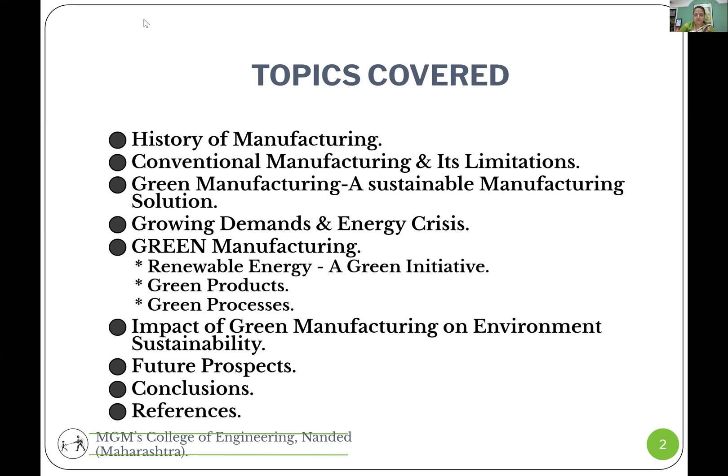So we will be covering in this webinar: we'll start from the history of manufacturing, see a little bit about conventional manufacturing and its limitations, and then go for green manufacturing and a sustainable manufacturing solution, taking into consideration the challenges with respect to energy, products, and processes. We'll see the impact of green manufacturing on environmental sustainability and future prospects.

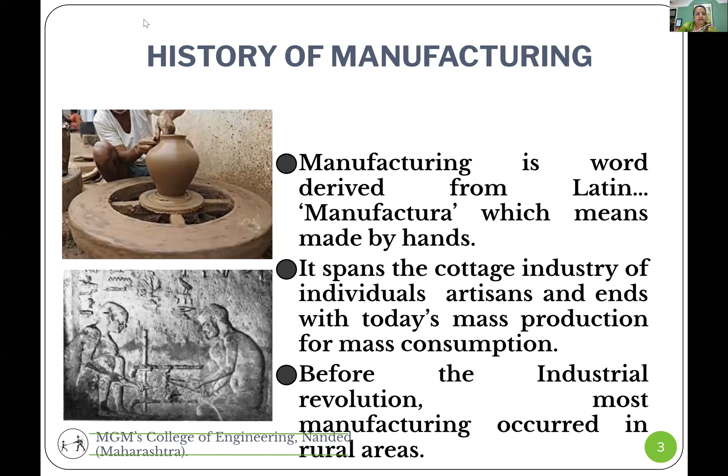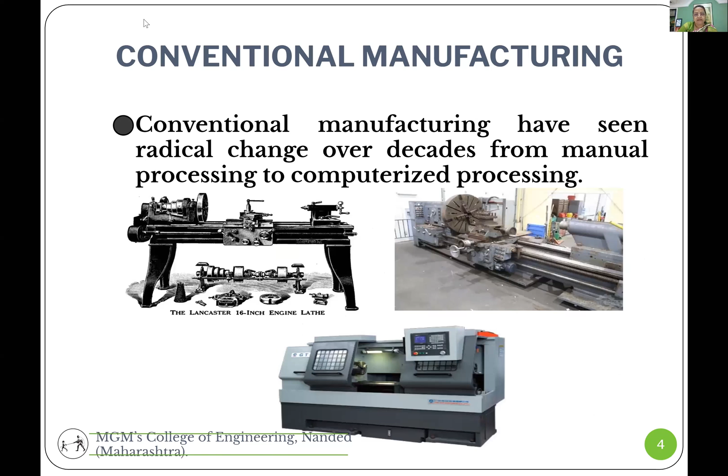So what is happening is the manufacturing system creates material wealth for human beings, but it also creates a lot of waste and consumes a lot of energy. So we have to keep thinking about how we reduce this energy consumption and how we make this production process environment friendly.

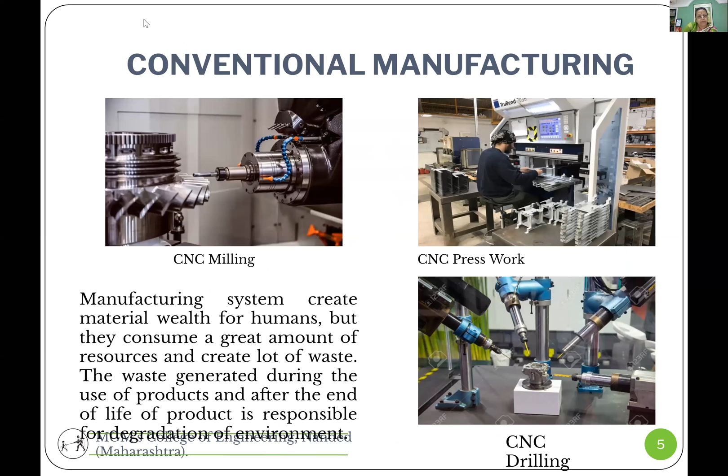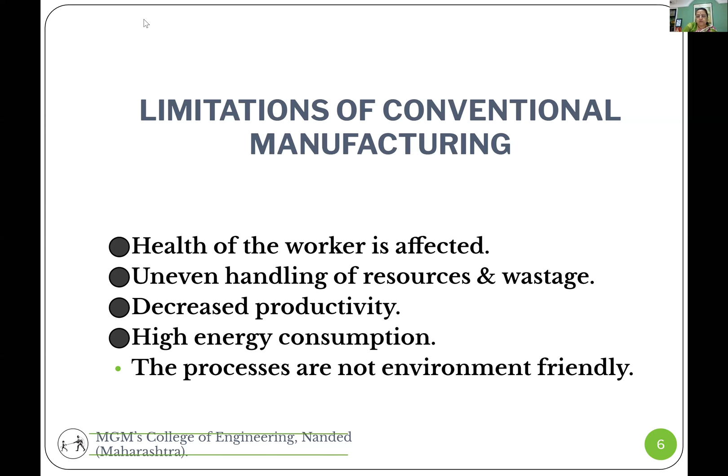Limitations of conventional manufacturing are: because of the coolants and lubricants used, health of the worker is affected due to emission of hazardous vapors in the environment. There is uneven handling of resources, a lot of wastage, productivity is decreased, and energy consumption is very high. So ultimately the processes are not environment friendly.

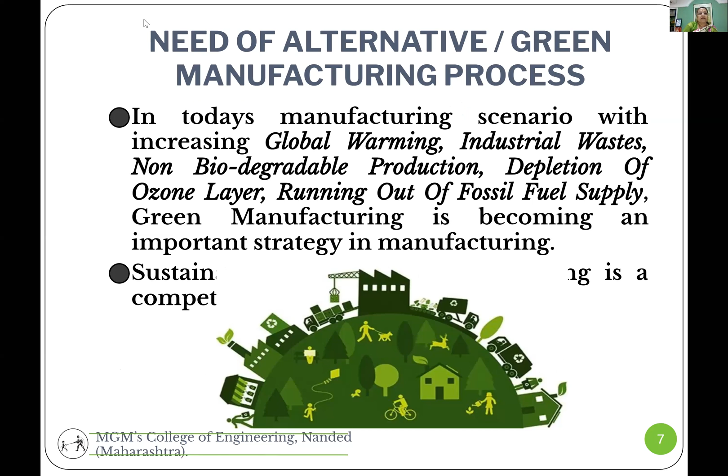So in today's manufacturing scenario, with increasing global warming, industrial waste, non-biodegradable production, depletion of the ozone layer, and running out of fossil fuel supply, green manufacturing is becoming an important strategy. Sustainable or green manufacturing is basically an economized manufacturing process that tends to exploit all available resources, leaving behind reusable or biodegradable waste, thus justifying the concept of environmental sustainability.

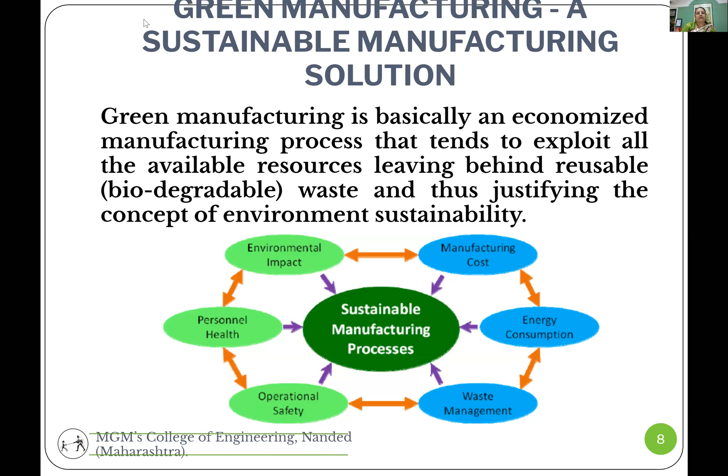There is growing demand and an energy crisis that has to be looked after. If we look at history a little bit, between 1950 and 2005, worldwide metal production has grown six-fold. Oil consumption has risen eight-fold. Natural gas consumption has risen up to fourteen-fold. And greenhouse gas emissions are going to be doubled by 2050. We are talking about ozone layer depletion, the greenhouse effect, and we are leading towards doubling emissions by 2050 if we don't do anything.

You know that India is the fourth largest economy in the world, and we are ranked fifth as far as gas emissions are concerned. We are fifth in gas emissions in the world, and we are contributing about 4 million tons of...

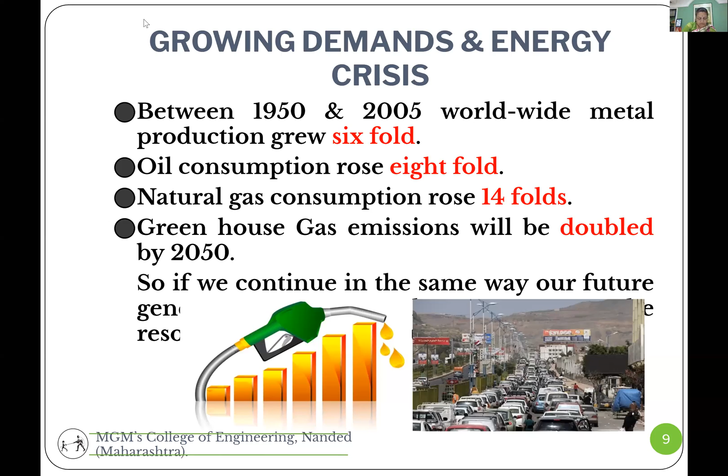Green initiatives are very important in today's scenario. When we talk about green initiatives, we have to talk about three aspects of green manufacturing: the energy used for manufacturing should be green, the products should be green, and the processes also should be green. We cannot go for perfectly green things many times, but we have to reduce energy consumption, reduce waste, and use the cleanest energy sources.

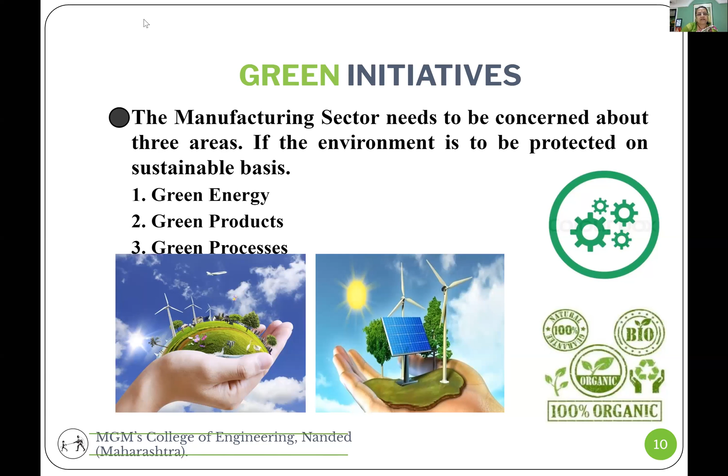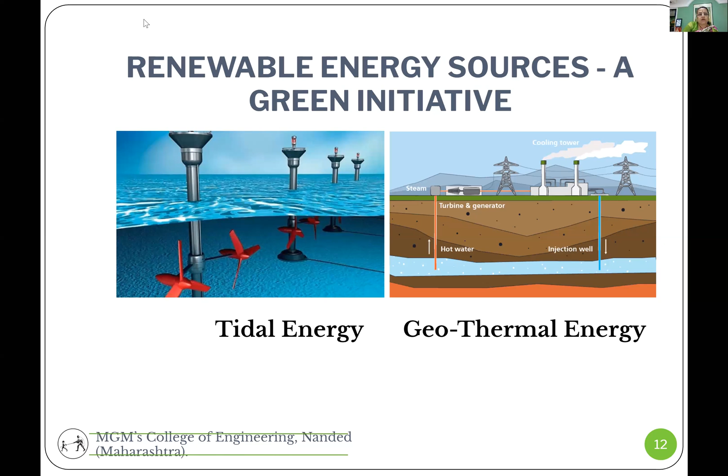Now here it could be seen, this is wind energy, which is one of the cleanest sources of energy. There is tidal power energy, and there is geothermal energy as well. In geothermal energy, cold water is made to flow over the hot strata inside the earth, and hot steam under high pressure comes out from the other end. Here it could be seen, and the steam could be put to use for different energy generation purposes.

These are methods to reduce energy consumption. These sources of energy should also be clean, and we should optimize energy consumption when actual production is going on. So these were a few examples of clean energy, and we'll see how energy is to be optimized while actual processes are going on.

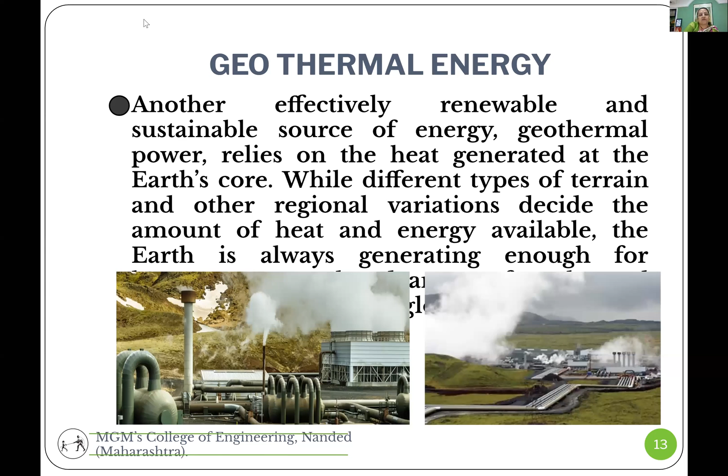Synchronization of spindle acceleration or deceleration with the feed system reduces 10% of energy consumption, as observed. So we should go for this.

Operations like deep drilling require the drill to be periodically taken out to remove the chips, because chips created inside create a hindrance for the drill, affect the surface finish, and increase the power required. So we can introduce a cleaning operation with the help of a pecking cycle intermittently for the chips generated, and save the power required for deep drilling. We can also develop mathematical models for electrical energy use in machining, validating the tool path, thus making machine tools more energy efficient.

Selection of process parameters also plays a very important role. I had done my doctorate thesis based on selection of process parameters, where I optimized the process parameters for maximum surface finish and energy optimization. If the proper process parameters are selected, we can save energy without compromising the quality of the product that is required. So energy could also be recovered.

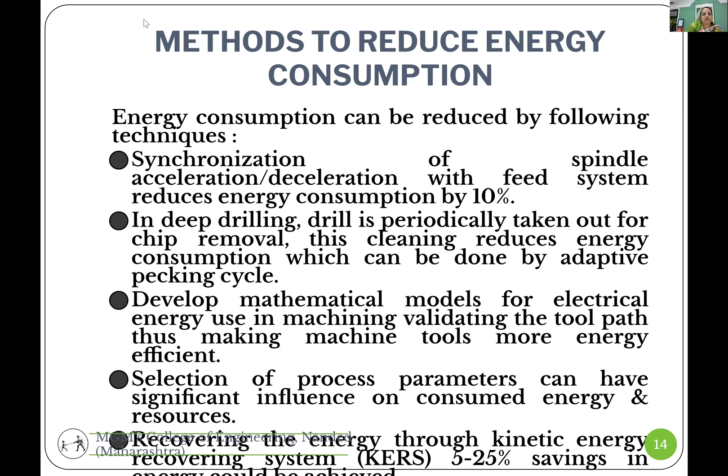Now we talk about green products. A green product is a sustainable product designed to minimize its environmental impacts during its whole life cycle, and even after it is of no use.

So when this life cycle approach is taken, the life cycle assessment is done at various stages of the product - before manufacture, during the stage of design and transporting raw materials, during the actual use of the product, and when the product becomes of no use. At various stages the life cycle assessment is done and quantified.

In one of the papers I referred, a car production was considered, and it was seen that the energy consumed in production of the car is 9.2% during the resource extraction and transportation stage, the initial stage before actual production starts. The production and selling of the car consumes about 13.9% of the energy.

And during actual use of the car, 76.8% of the energy is consumed. And after the life cycle ends, it's just 0.1% energy consumed. So the biggest impact is made at the consumer use stage of the life of the product. Since it's 76.8% during actual use of the car, this is the stage where we have to pay maximum attention to bring out changes to reduce energy consumption, increase efficiency, and decrease the exhaust gas emissions.

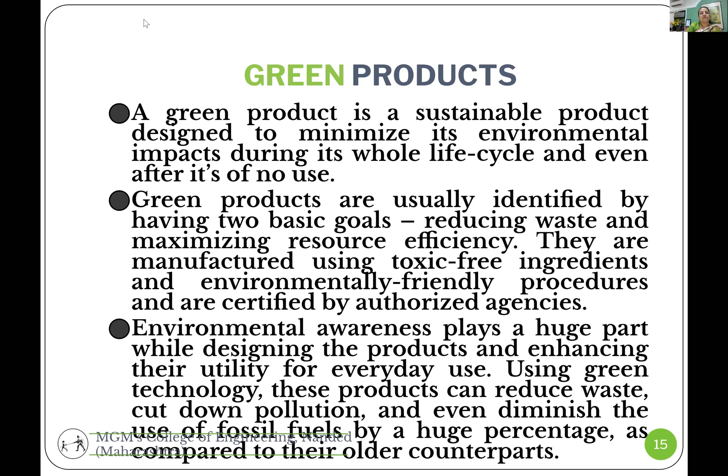Now, if we consider the example of Tesla electric cars - conventional cars have about 3,500 parts in the assembly, whereas this car is said to have only 12 parts. Look at the drastic reduction in the number of parts used. So there is drastic reduction in fossil fuel consumption, efficiency is increased, and most importantly you have no dangerous exhaust gases to take care of. The engine of the car is the culprit, having maximum number of parts inside. Here it's replaced by a motor, like we have the motor in electric cars, so the engine and its multiple number of parts are all deleted.

Now there are some other eco-friendly products coming up and being advertised by different companies.

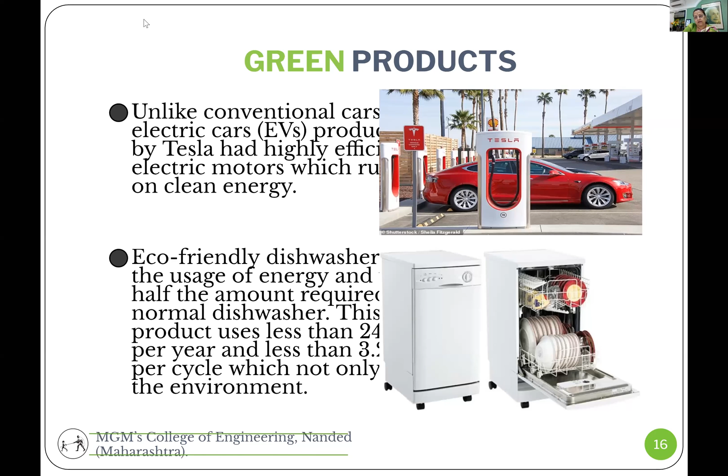Here you see a dishwasher which is claimed to use 50% of the water and 50% of the power required by its counterparts. There are some other products like refrigerators and HVAC systems which are given star ratings nowadays, based on their power consumption.

There are programmable thermostats installed in air conditioning systems, and they maintain the desired temperature. They cut the supply when the desired temperature is achieved, and bring back the supply when it is required to reduce the temperature. So this is how the products are being designed.

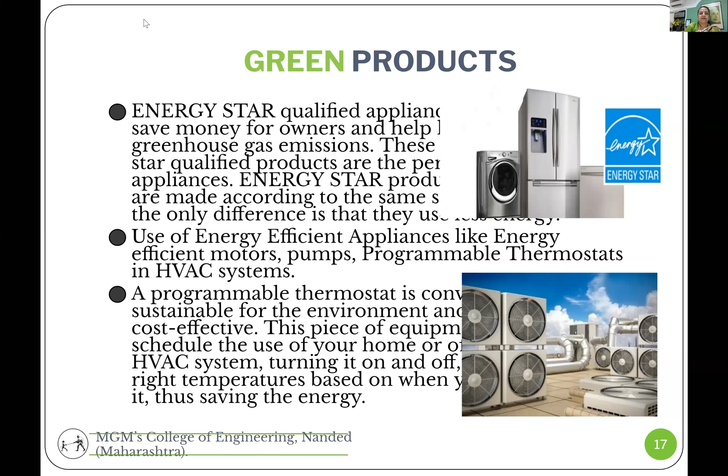Something about green products, we'll go for the green processes. The state of the global environment is a matter of concern for everyone. Increasing pollution and fast depletion of the Earth's resources threaten the future of our planet. Green technology comes to the rescue of the human race, to protect the future of our planet, because it is our responsibility to hand over this planet to the next generations in better condition than what we have had it.

We have deteriorated the environment to a great extent over the last few generations, and every generation, including ours, should take care of bringing back the earth to its original or a better state with the help of green technologies. Green technology is a relatively new area of expertise, but it is growing fast because there is a viable need to reduce the detrimental effects of pollution, global warming, and greenhouse effects. Green technology will bring innovation to daily life, ensuring continuous scientific and technological progress while also protecting the environment.

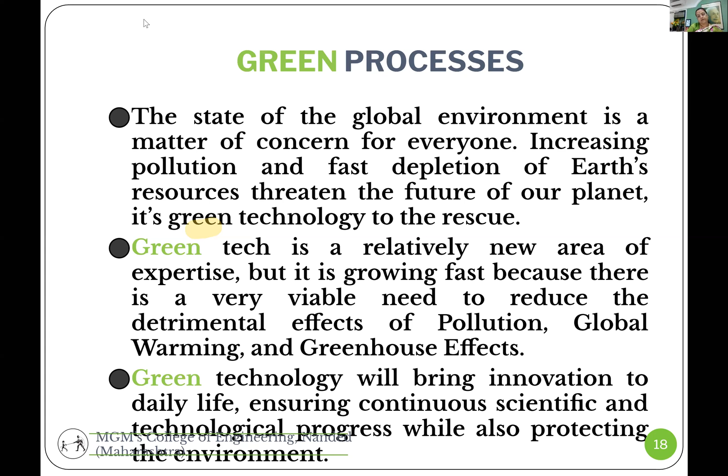Now we look at the green processes, starting with the conventional processes like casting, which is an age-old process still being utilized. The disadvantage of casting is the heavy metals that remain after the casting process is done.

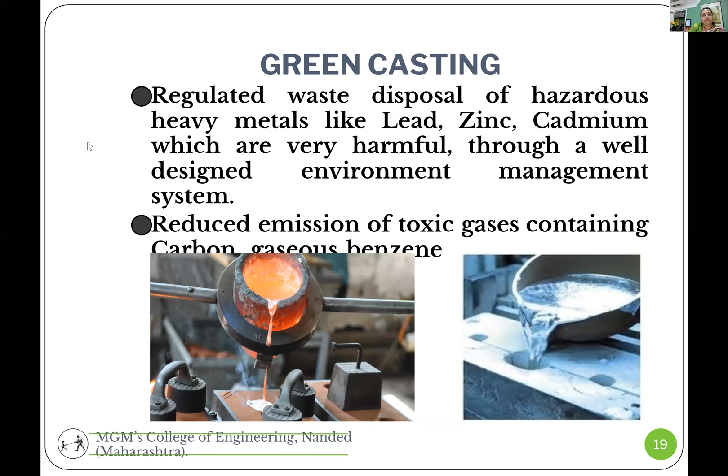Now, green machining. After casting, we'll look at machining. What is happening in the machining?

Nowadays cutting fluids in machines are used extensively to remove and reduce heat during machining operations. The use of cutting fluids enhances machining quality and reduces the cost of machining by increasing tool life, but the mist and vapor generated is very harmful. It is said that it causes skin cancer for operators who are in the vicinity of these hazardous vapors.

That's why researchers have gone for minimum quantity lubrication nowadays. In this picture you can see that the lubricant or cutting fluid mixed with air under pressure is provided to the tool itself. Here we see a milling cutter and a drill through which the vapor mist is coming. It is deployed at the point of cut, mixed with air under pressure, so that minimum quantity of lubricant is used and the vapors generated will be minimized.

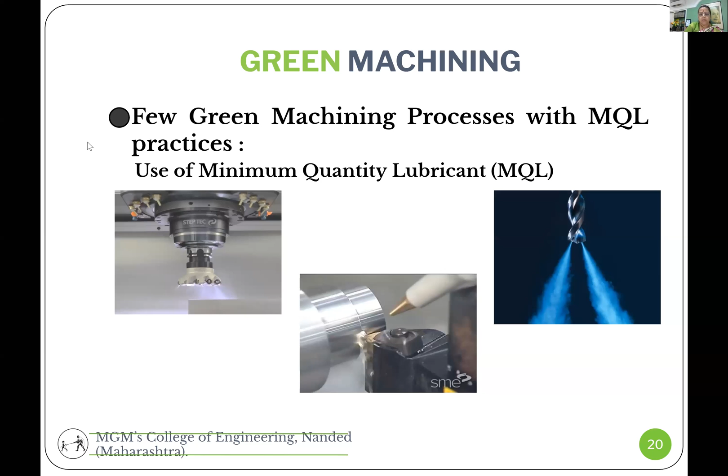But sometimes, some metals which are very difficult to machine, like titanium alloys or Inconel, the space age metals, require flooded lubrication, with huge quantities of cutting fluid deployed. There it is unavoidable. Flooded lubrication is seen here for multiple drilling or milling operations, and this mist is inevitable to be generated and it is hazardous.

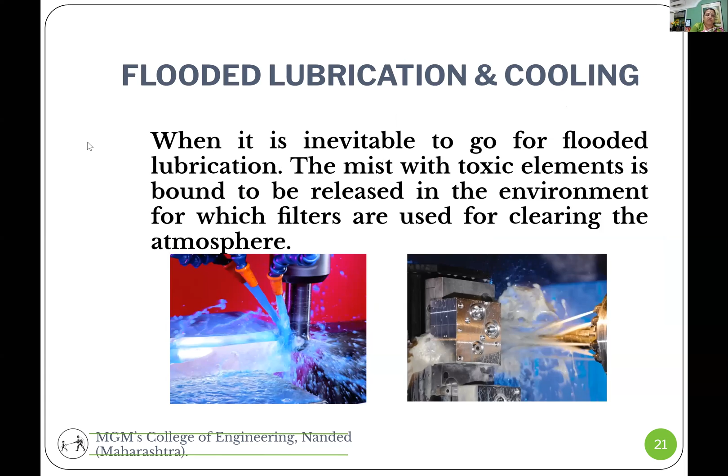Here, filters are used for the mist generated from the use of flooded lubrication. Let us see.

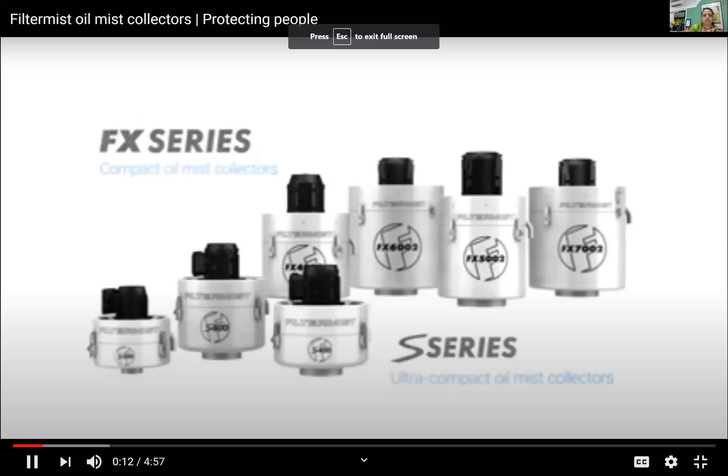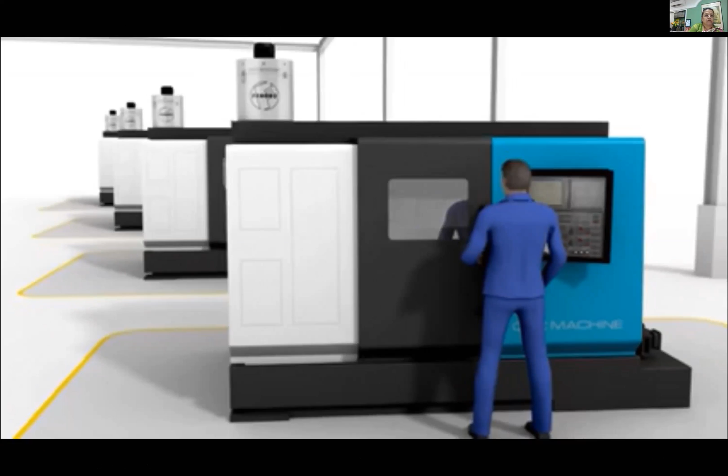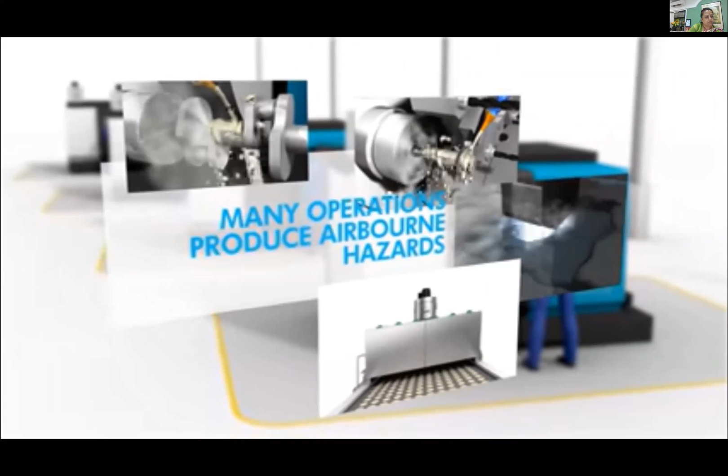Filtermist units efficiently remove oil mist, coolant mist, fumes, and steam in thousands of manufacturing operations around the world. It is the robust, reliable, and proven solution for eliminating oil mist. Operations including turning, grinding, milling, spark erosion, sawing, and even food processing can result in operatives being exposed to a wide range of airborne and hazardous substances in the workplace. Depending upon the content of this pollution and the extent of exposure, operators and employees can experience a wide range of adverse health effects and diseases. This toxic fume is also a direct safety hazard as surfaces become covered in a slippery and flammable oil film, presenting a risk of serious injury and fire, as well as damaging equipment throughout the factory.

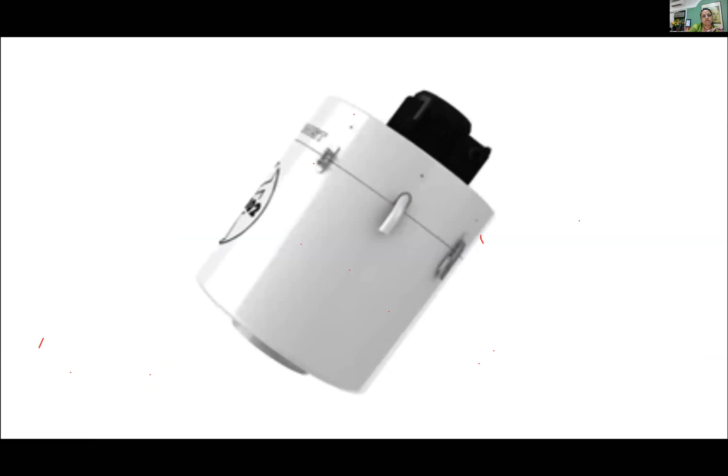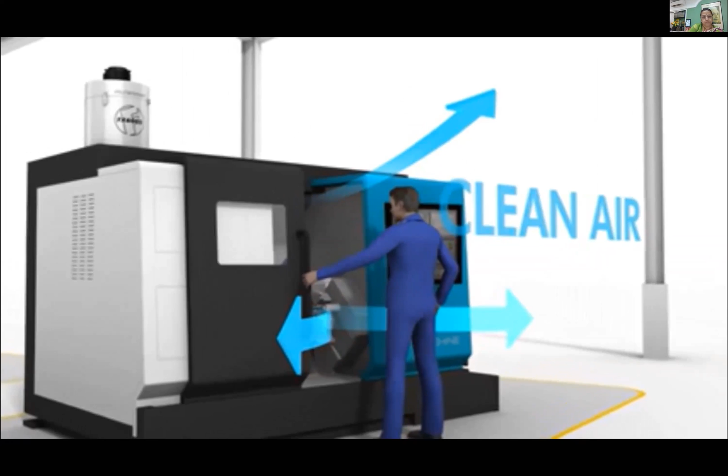Developed through 45 years of global experience and the expertise of internationally recognized centers of engineering excellence, Filtermist is proven worldwide as a highly effective, easy to fit and easy to maintain solution for oil mist removal, extracting oil mist from its source and ensuring a clean and safe environment for your workforce.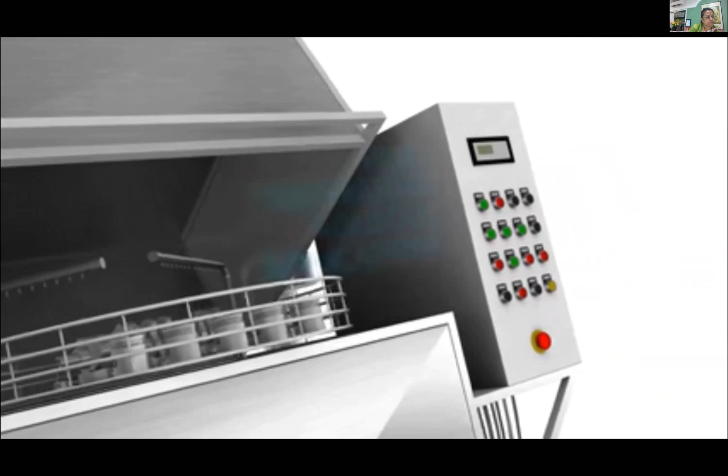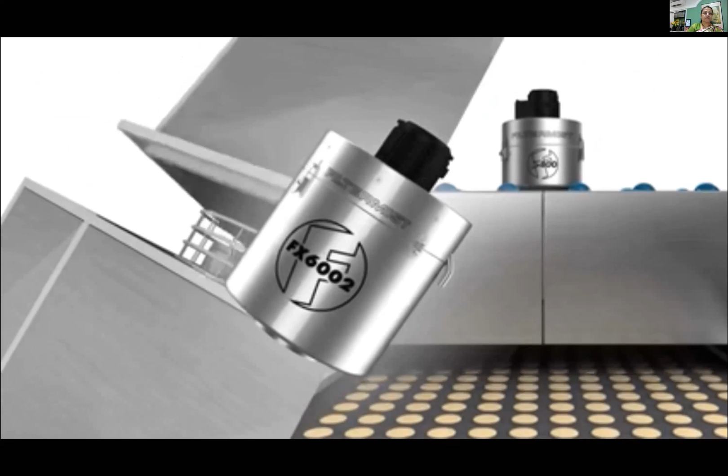Filtermist units are also ideal for collecting and removing steam generated in high-temperature aqueous applications, such as parts washing. Water droplets, dirt and detergent contained within it can be dangerous to health as well as damage machinery if not removed effectively. Filtermist offers a stainless steel unit specifically for use in parts washing and food production applications.

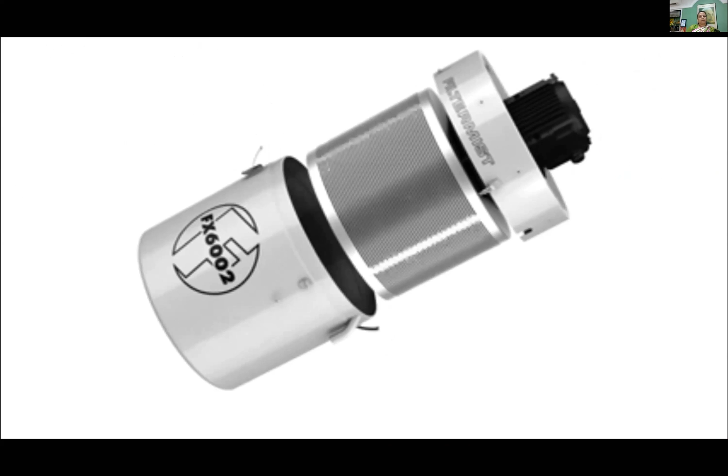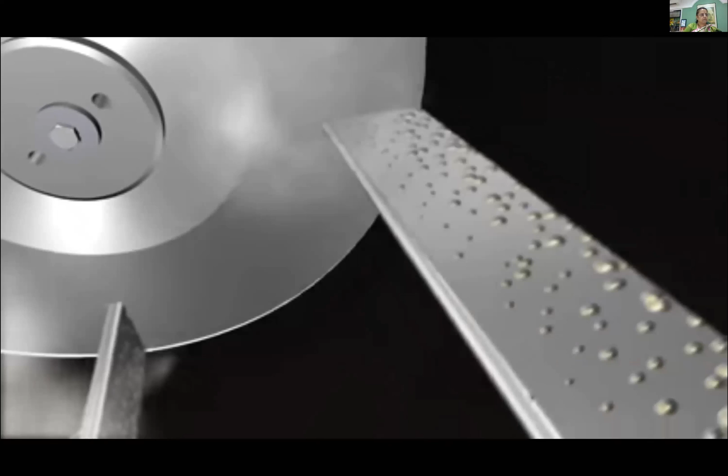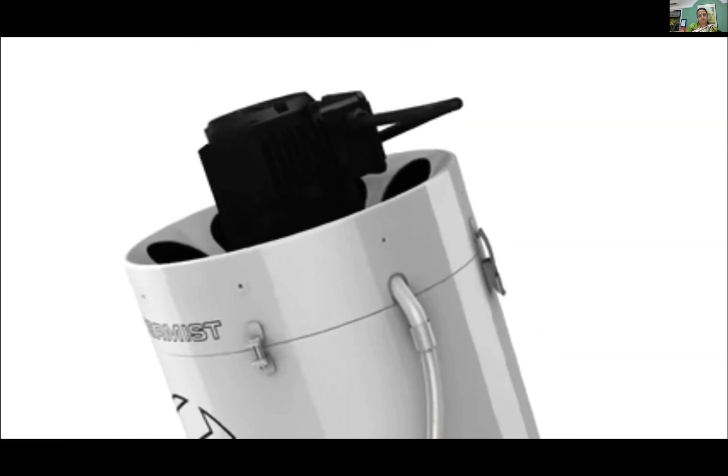As with many ingenious inventions, the principles of the Filtermist are elegantly simple. A perforated drum with specially designed vanes rotates at high speed. Oil mist is drawn into the unit and impacts on its vanes at high velocity. Special drum pads assist the coalescing process and filter out stray solid particles. Centrifugal force pushes oil to the unit's outer case, where it drains back to the machine for reuse or collection, and clean air is returned to the workshop through the top of the unit.

For applications that generate smoke or any submicron particles, filters can be retrofitted to the Filtermist units. Fitting is a very simple operation, as the device is held in place over the exhaust end of the Filtermist unit.

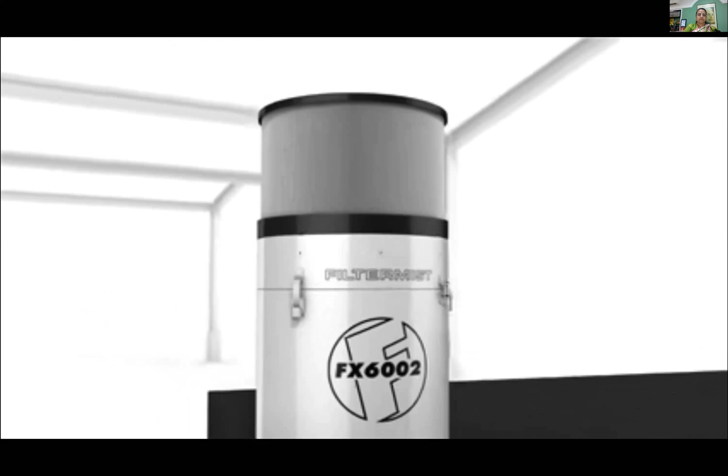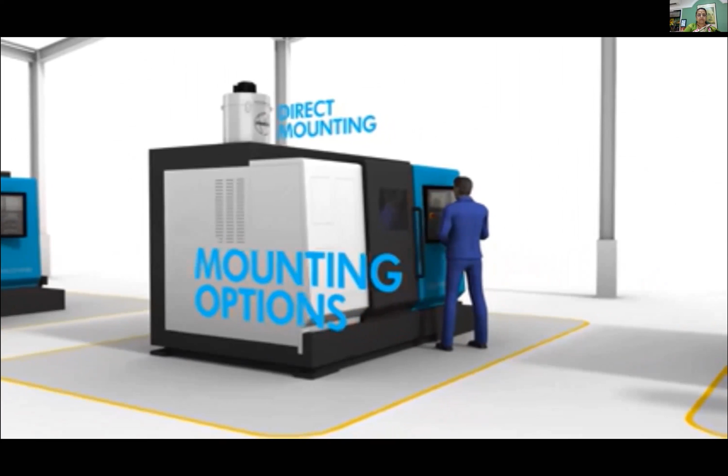Because every situation has its own particular requirements, Filtermist has been designed with various mounting options in mind. In this case, shown here, the unit is mounted on top of the machine. Another option is to mount the Filtermist unit on a floor stand beside the machine, connected with ducting.

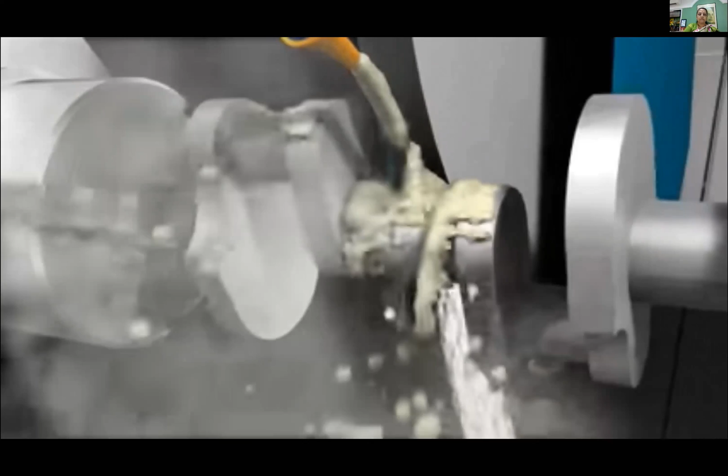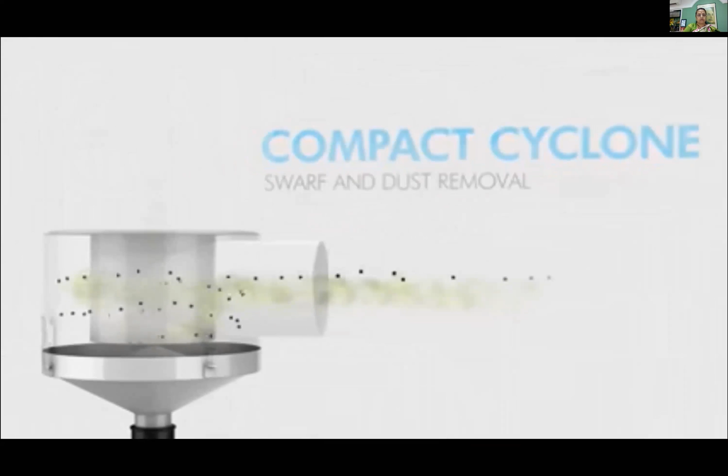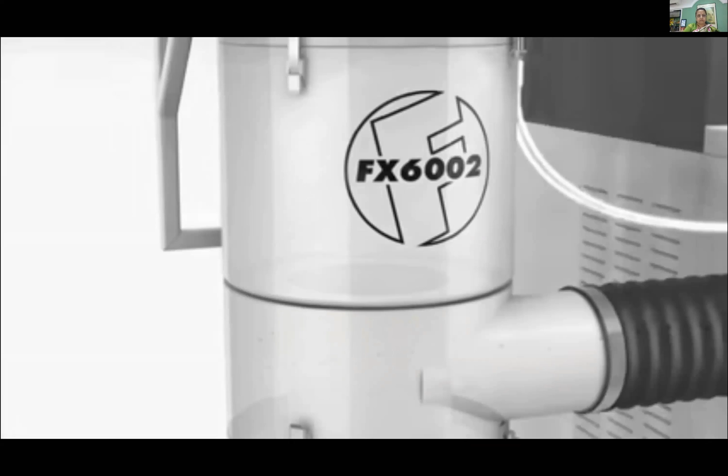For applications such as grinding, where the air is also contaminated with dust or metal fragments, the optional cyclone unit is designed to collect dust and swarf before it enters the Filtermist unit. The system is attached to the inlet of the Filtermist unit, and the contaminated air passes through it. The low velocity area within the separator encourages the heavier solid particles to fall to its base, where they can be easily extracted. Oil mist is then removed by the Filtermist in the usual way.

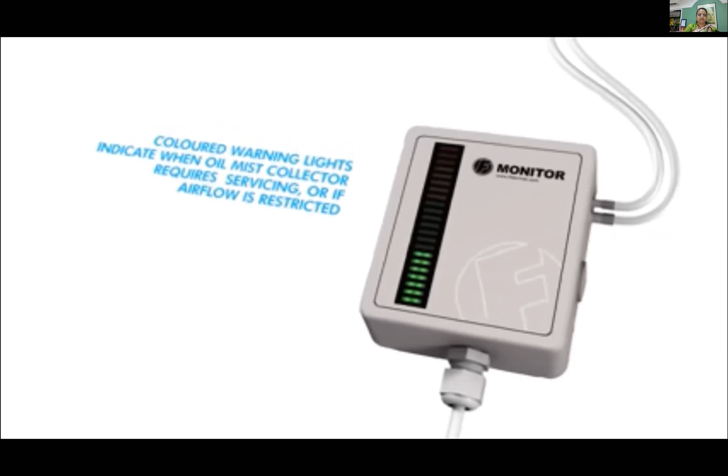For added peace of mind, Filtermist has introduced F-Monitor, a new automatic dual monitoring system that uses colored warning lights to advise machine operators when an oil mist collector needs servicing, or if there are any blockages in the system restricting the airflow. F-Monitor can be retrofitted to the complete Filtermist range and is sold as an optional accessory on all our oil mist collectors.

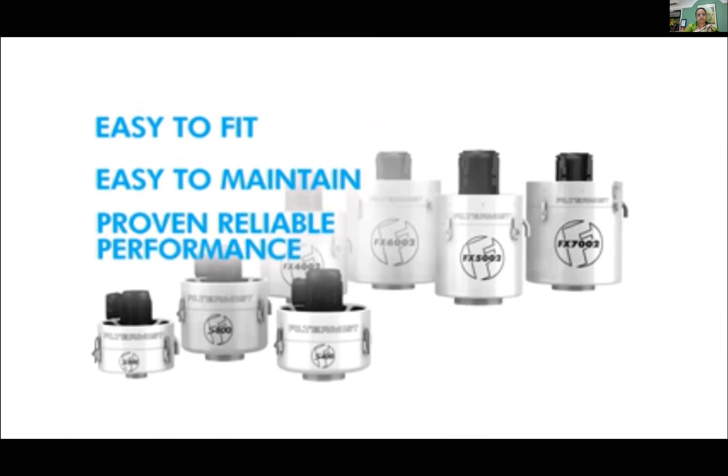With industry-leading products, Filtermist is established in over 60 countries worldwide, providing service and support whenever and wherever you need it. Easy to fit, easy to maintain, with robust and reliable performance that has been proven in over 100,000 applications. Filtermist oil mist removal systems are trusted to improve the working conditions of millions of workers around the globe. Filtermist: protecting people in cleaner, safer, more productive workshops.

So this is about the latest practices that are being followed in the industry.

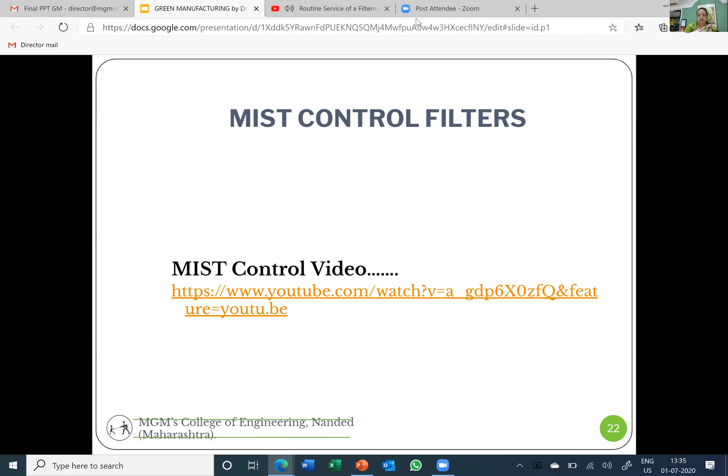Filtermist oil mist collectors use centrifugal impaction to remove or reclaim oil mist, coolant, fume, and steam from a wide range of manufacturing operations.

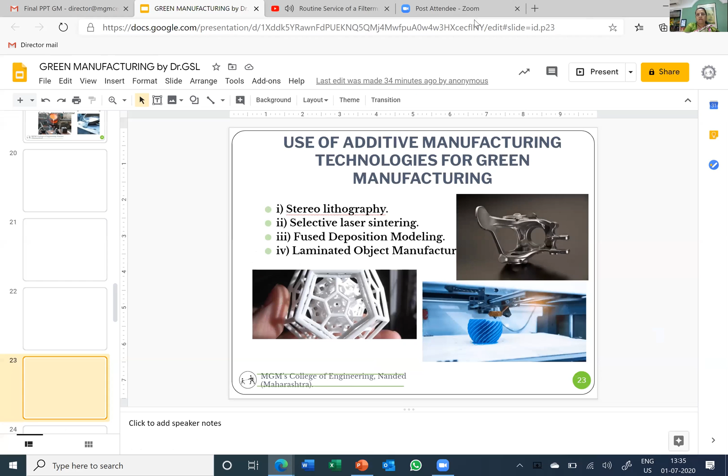Now, are there any alternatives for these manufacturing processes? We have seen that we can reduce the quantity of cutting oil to take care of the environment. We can go for minimum quantity of lubricants. Where it is unavoidable to go for flooded lubrication, we can deploy filters, and we can take care of the release of dangerous gases or vapors to the environment.

Then can we go for some alternative technology? Additive manufacturing is coming into the picture nowadays, with stereolithography and selective laser sintering as some of the processes. Fused deposition modeling is another process, or laminated object manufacture is another. Objects like the medical implant shown here, which is a very complex shape, cannot be made with regular or conventional manufacturing. Such products are better made with additive manufacturing technologies. So these are some examples here for additive manufacturing technologies.

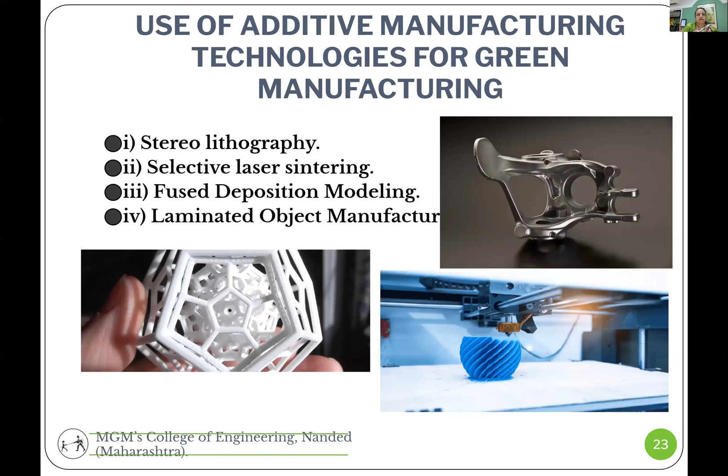Some advanced technologies are coming up nowadays, like simulation. Now CNC machines are there, computer controlled machines, and there are simulation software. So in advance, we can simulate the product which is to be loaded to the CNC machine with the help of software like AnyLogic, MATLAB, SimScale, Simul8, Simulink, and Arena.

There are softwares by companies known as MSC Software and Hexagon, in collaboration with whom we are setting up a Center of Excellence, a Technical Excellence Center, at Aurangabad, which will give training about all these techniques and various controls - rapid prototyping, a drone lab, and advanced driving systems like automatic driving assistance.

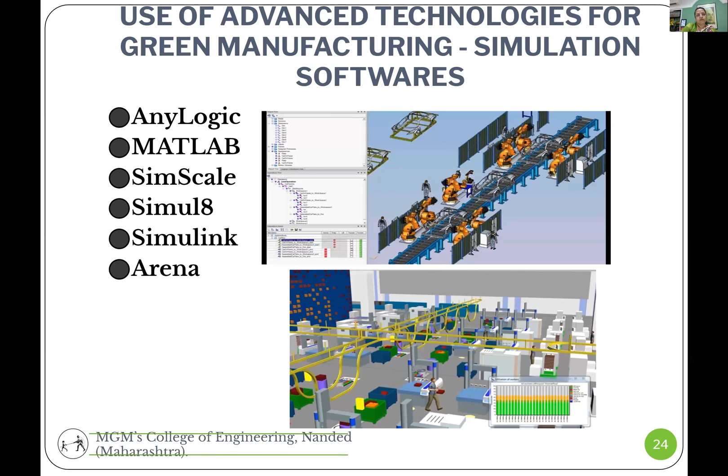So that's a different thing, but because in advance we can plan for that and execute it, saving energy.

Now there are certain advanced techniques like incremental forming that are coming up, where we have to form a sheet - suppose we have to give a desired form to a metallic sheet.

What we have to do is, when the product is of bigger size, we have to go for bigger punches or presses, requiring more power. Instead of that, a new approach is that whatever the desired shape is, a small tool is made to follow a desired path to generate that shape.

We save energy on a huge scale with this. Instead of operating a big press generating big heat, we achieve the same effect with a much smaller tool, giving it the desired profile or path to follow to generate the desired shape.

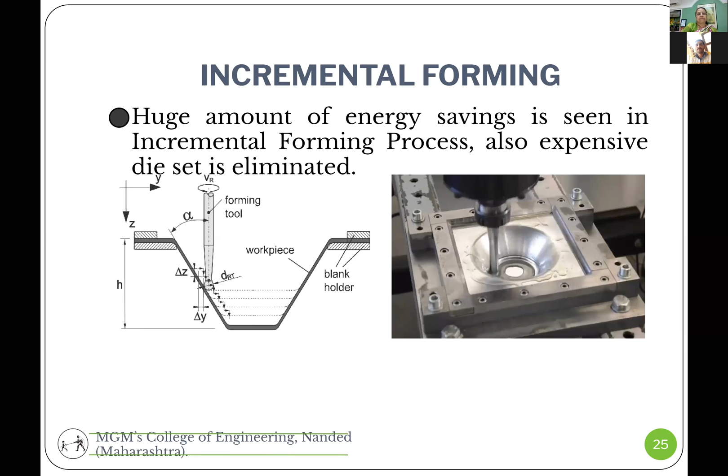Now, the catalytic converter - I read about this too. This is not a very new technology; it's installed in the exhaust path of automobiles or even CNC machines. The exhaust gas from an internal combustion engine is passed through this catalytic converter.

Redox reactions - reduction and oxidation - take place here. Dangerous gases like carbon monoxide are converted through oxidation to less hazardous carbon dioxide, which is desirable since trees grow with carbon dioxide. Nitrogen oxide, through reduction, is reduced to nitrogen. You know that more than 70% of our regular atmosphere is nitrogen.

So when it is nitrogen, it is not dangerous; when it is carbon monoxide, it is dangerous. So it's converted through oxidation to carbon dioxide, and thus the hazardousness is reduced to a great extent with the help of such devices.

This was invented by a Mr. Mooney, who happens to be an alumnus of New Jersey Institute of Technology, where my son has studied. So he gave me information about this catalytic converter.

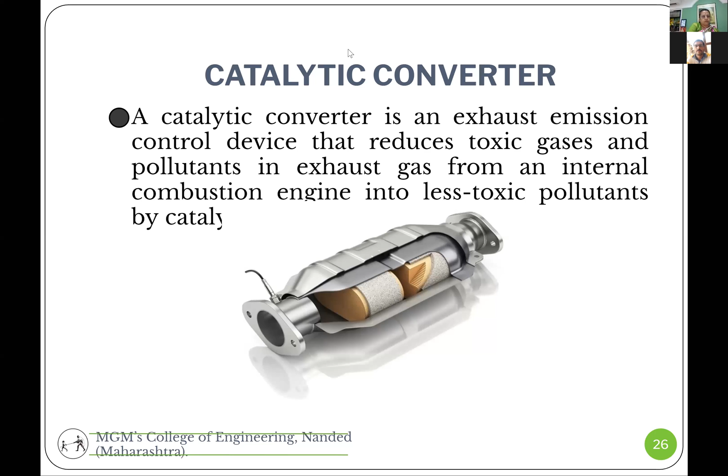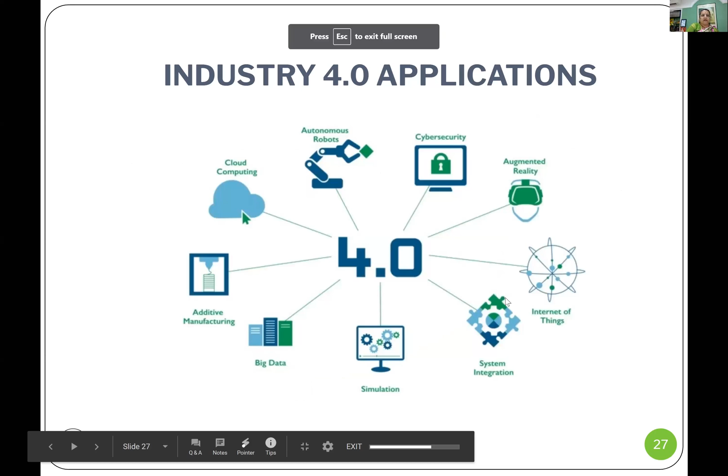Industry 4.0 applications - I think somebody is going to give you a full lecture on this, so I don't have to explain about it. But the latest concepts include cloud computing, Internet of Things, and augmented reality.

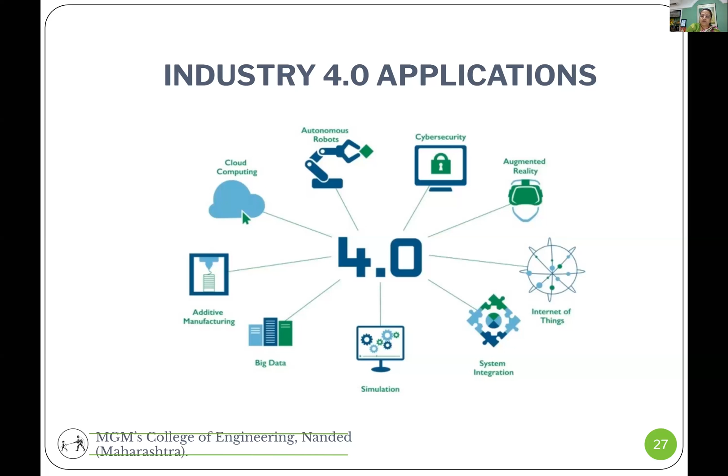We can apply our creativity to a great extent with Industry 4.0 applications, and use these applications in the interest of reduced energy consumption and enhancing the efficiency of things working, and go towards green manufacturing.

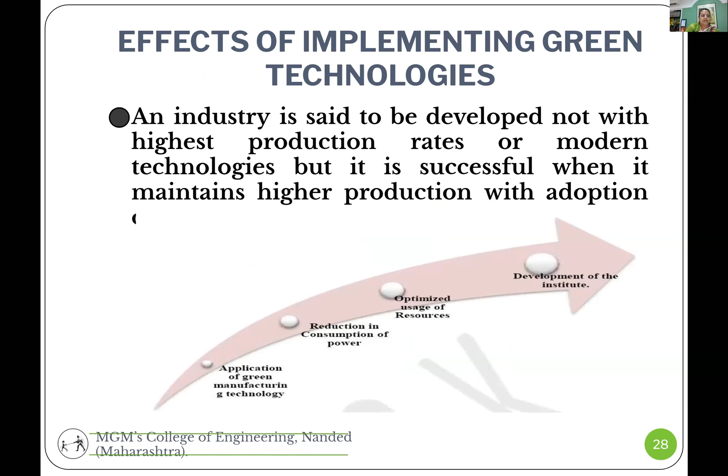Now, benefits of green manufacturing - altogether it improves the corporate brand. If our industry is a green industry following the principles of green manufacturing, we go for lesser emission of hazardous gases or vapors, improved health of the workers, and we automatically improve the corporate brand, along with improved health and morale of the workers.

Increased market opportunities will be there, promoting green production. There will be lowered regulatory concerns - we have to bother about so many regulatory concerns imposed by the government and various regulatory authorities, so if we follow these practices, we will have lower concern towards regulatory things. There will be reduction in cost because of lesser power consumption and reduction in wastage, so improved product performance is obviously there, and compliance achieved in the long term.

We get long term benefits because of this policy adopted. We have decreased liabilities and reduced carbon footprints. This has been the result of a survey of, I think, 198 SMEs, and it has proved that we improve on all these counts.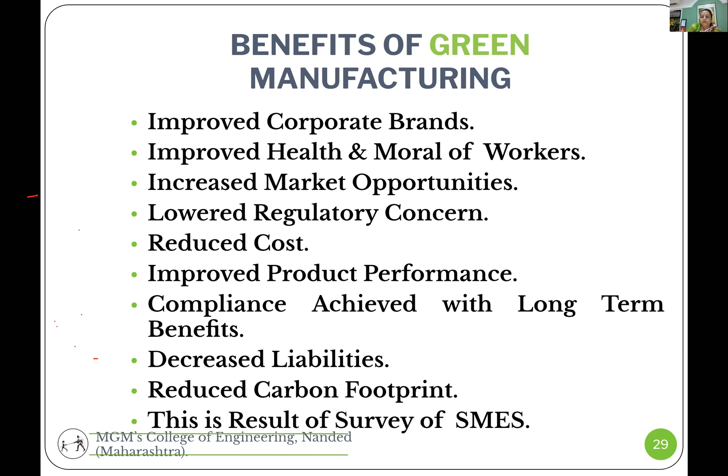So for the manufacturers, if we want to give the Go Green tips, what are they? Implement an environmental management solution in advance, implement production rules for engineers, provide early access for the planners about how much energy it is going to consume, what are the different ways and means we can reduce the energy consumption, and how can we reduce the waste.

We have to keep on monitoring the usage of all the appliances, technologies, and manpower. We should go paperless. We should evaluate motors and drives.

I read about KSB motors, and one of my colleagues, Dr. Jasbir Singh Sidhu, was sharing with me that the KSB pump he installed on the borewell at his home draws much lesser current than its counterpart having the same power, and hence the energy consumed and running expenses go very low. So evaluate the motors and drives you are utilizing on the shop floor for production, and go for less power consuming devices. Then keep conducting energy audits periodically, and review the energy consumption to find ways and means to reduce it in your production process.

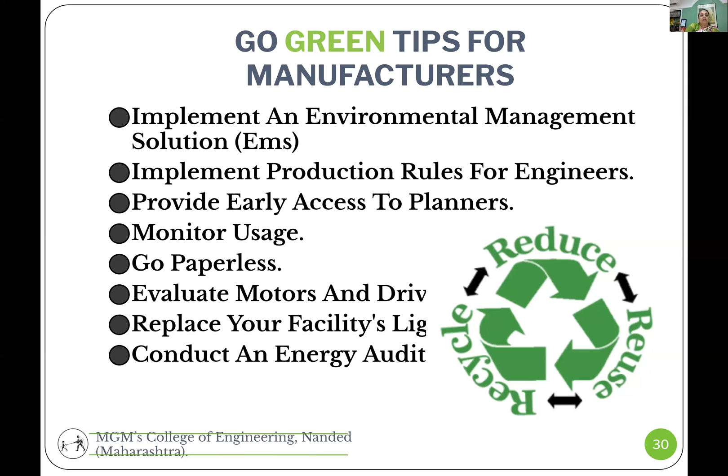Now, on how this affects the environment: it reduces the energy consumption, it reduces the fuel consumption, it reduces the toxic emissions, it reduces the pollution in general, and reduces the greenhouse effect and carbon footprint.

Depending on the amount of carbon or methane generated because of the production processes, the carbon footprint of the industry is evaluated, quantified, and assessed. And in lieu of this carbon footprint, industries are now encouraged for plantation, equivalent to the carbon footprint generated, by the industries.

We have to keep on monitoring this. Engineering colleges have also received circulars from AICTE to assess the carbon footprint generated, because you are putting so many people together and carrying out certain practicals, so you are also responsible to some extent for the pollution you are creating, and you should go for plantation of trees in lieu of the carbon footprint you are going to create in the environment.

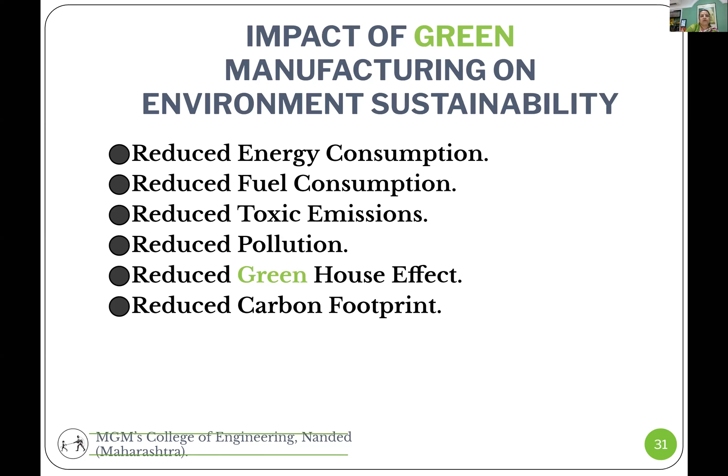Now, if we see the future prospect of green manufacturing, there is the World Business Council for Sustainable Development, which describes a world in which manufacturing industries follow life cycle approaches. We have discussed life cycle approach in brief; you can read more if you want. This enables dematerialization and expanded service systems. This report is called the Vision 2050 report and is based on green manufacturing as a very crucial weapon.

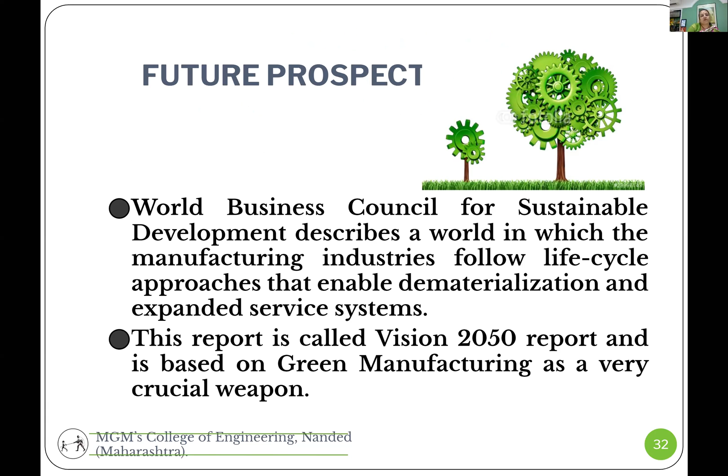Now we can go for the conclusion: green manufacturing focuses on primary goals such as minimization of emissions and effluents, use of renewable energy resources, and life cycle costs for products and services.

An industry which has already been established cannot shift suddenly. It is obvious that if we talk about green manufacturing ways, like installing different drives and motors in the industry, an industry working for years together cannot change the scene overnight. But new manufacturers can in advance think of applying green technology and green processes, and plan for green manufacturing from the beginning. Industries running for years cannot change suddenly, but they can definitely think of going in stages for applying and implementing green manufacturing ways.

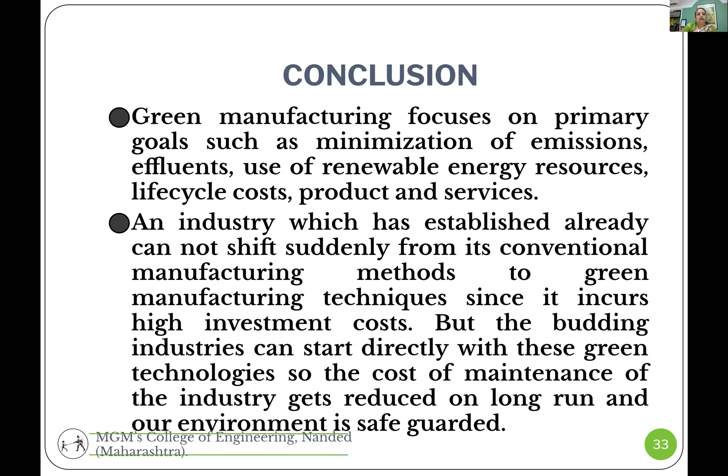Green is not a process actually, but a way of thinking. We should think in the green way, think of improving the environment, and take care that every action we take is not causing any harm to the environment around us. Let us at least be the generation which has started making it better for the generations coming.

Lighting in the shop floor also, or lighting in our institute also.

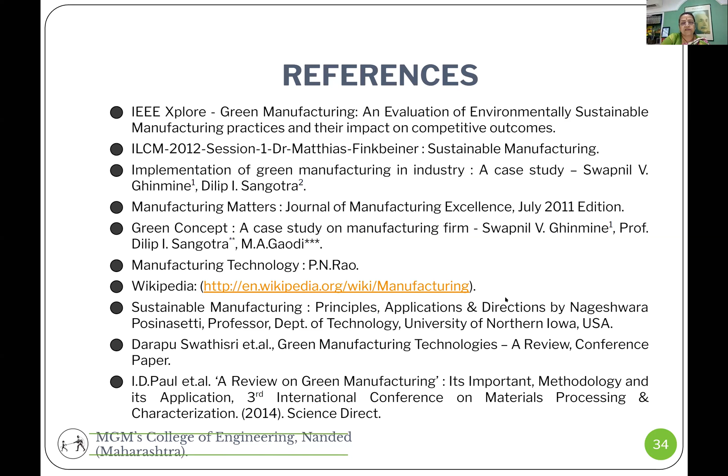We go for the lesser energy consuming devices which are available nowadays, like LEDs and all. These could be installed in the industries, those could be utilized in the institutions as well. We can save every bit of energy that is getting utilized, ultimately adding to the environment. So let us think about the world to be the green world of tomorrow.